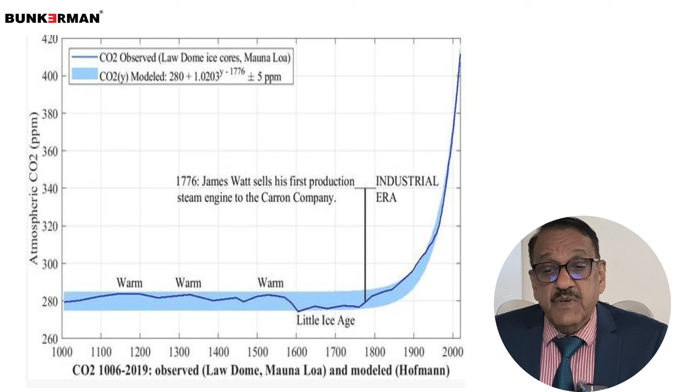Today, the world average of CO2 in atmospheric air has already risen from earlier 280 parts per million to about 425 parts per million. But in places like Delhi, it is now crossing even 600 to 900 parts per million at several places. This is now becoming a cause of great concern for us.

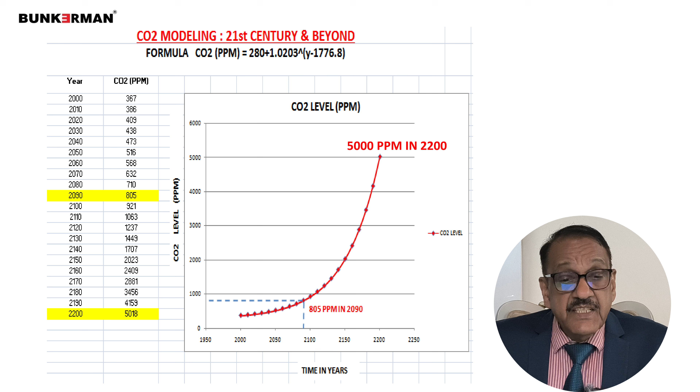If we do not arrest this rising trend of CO2 in atmosphere now, then very soon it is going to cross a very dangerous level of 5000 parts per million in the near future, as shown in this graph. As you can see, the acceptable level of CO2 in indoor breathing air is about 500 to 700 parts per million.

People start having complaints of stuffiness and odors beyond this level. Even ASHRAE recommends a maximum level of 1000 parts per million for CO2 in indoor air. Any further increase of CO2 beyond 1000 parts per million results in general drowsiness and adverse health effects. A level of 5000 parts per million may lead to serious oxygen deprivation, leading to permanent brain damage, coma or even death.

Therefore, at this level, there is a danger even to the basic survival of human beings and other life on earth. And that is the reason why the whole world is now worried about the devastating nature of rising pollution, global warming and climate change. Fortunately, the Bunkerman technology addresses this problem and provides a sustainable solution, as shown in these pictures.

But subsequently, due to increase in industries, vehicles, traffic, increase in air conditioning, deforestation, etc., the increased carbon emission in the environment has gone beyond the absorption capacity of the natural system on earth, thus resulting in disruption of this earlier existing sustainable system.

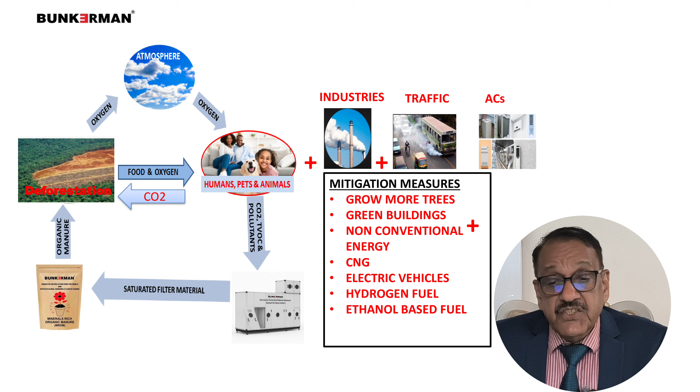Over the past few decades, our government is trying to overcome this problem by adopting several techniques such as growing more trees, green buildings, non-conventional energy, CNG, electric vehicles, hydrogen fuel, ethanol-based fuels, etc.

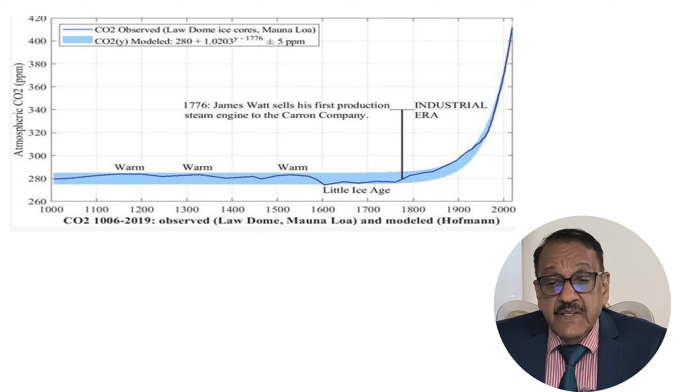But this rising graph of global warming and CO2 content in atmospheric air is not going to stop, and it is continuously rising further at a steeper rate than earlier. The reason for this is that whatever little reduction we achieve in carbon emission by the above measures is getting nullified and overtaken by further increase in carbon emission due to increase in population, industrialization, vehicular traffic, air conditioning and other development activities.

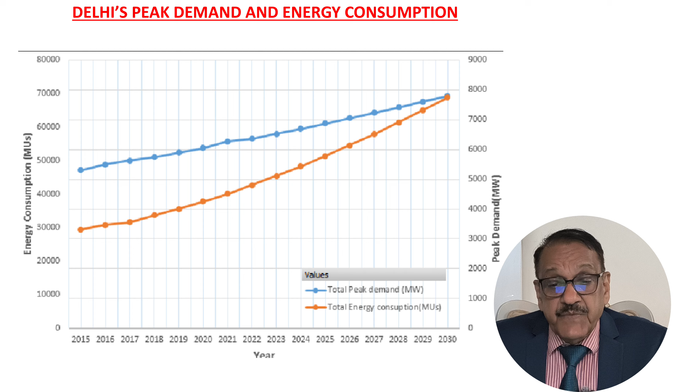Therefore, the model adopted to solve this problem should be such that it is able to reduce atmospheric pollution despite all the above increasing factors in future. The model presented by Bunkerman technology fortunately offers such a befitting model to suit the above requirement.

In Bunkerman systems, we absorb CO2, VOCs and all 8 air pollutants of AQI, that is PM2.5, PM10, carbon monoxide, sulfur dioxide, nitrogen dioxide, ammonia, ozone and lead, and also other toxic gases present in the air into our Bunkerman filters, and we do not release these pollutants back to the atmospheric air.

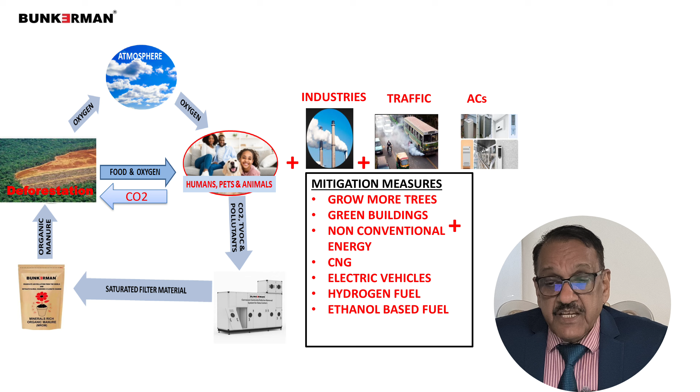The filter material is so designed that it gets enriched by the air pollutants in such a way that the resulting material becomes a combination of stable compounds which can be utilized to manufacture mineral-rich organic manure. This manure provides nutrients to farmers, crops, trees and plants. Thus, the complete cycle of movement of air pollution forms a sustainable eco-friendly system as shown in this picture.

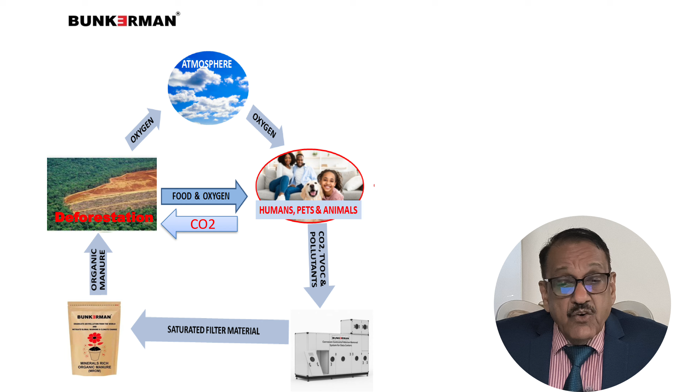This way, Bunkerman systems work as a supplement to natural trees and plants. They absorb the excessive CO2 and other pollutants from the air, both indoor as well as outdoor, which have now become beyond the capacity of the natural trees, plants and other systems on the earth. And these are converted into mineral-rich organic manure, which ultimately results in more production of food and oxygen by crops, trees and plants on the earth.

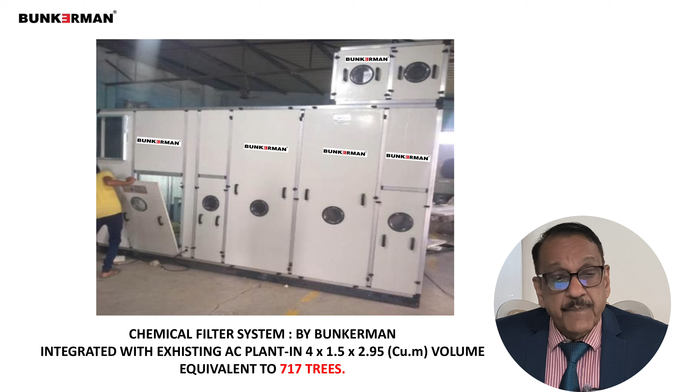Thus, an existing sustainable system which got disrupted by global warming may be fully restored on earth now by using this Bunkerman technology. Another advantage of using Bunkerman systems is that when these systems get integrated with the central air conditioning systems of buildings, they result in a power saving of 40 to 60% in AC plants. This saving is achieved by eliminating a large number of air changes per hour to control CO2 concentration within specified limits in such buildings. This will be explained shortly while covering the successful case studies by use of this technology.

Another reason why the present measures adopted by government are proving insufficient for climate action is that so far people are considering only fossil fuel industries and vehicles as sources of pollution. A very important and significant part of CO2 emission in air due to respiration by human beings and livestock has so far been neglected by researchers and planners, for reasons known to them.

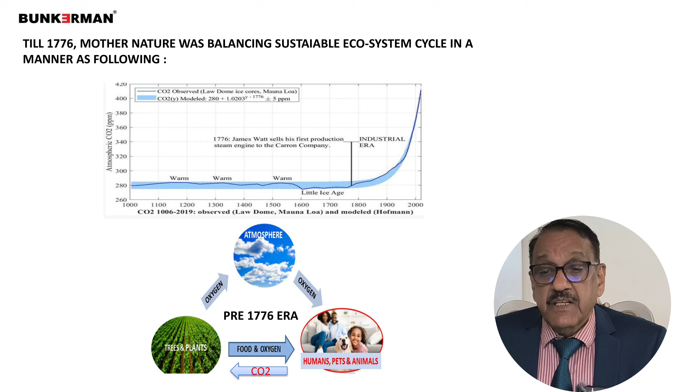Some justify it by calling it a natural phenomenon which should be taken care of by the natural systems of the earth. This justification could be accepted before the onset of the industrial era, when the CO2 level in air was in the range of 280 to 300 parts per million and the population on earth was limited. But now, since the natural system of trees and plants existing on earth has already failed due to overloading, this significant factor cannot be neglected anymore.

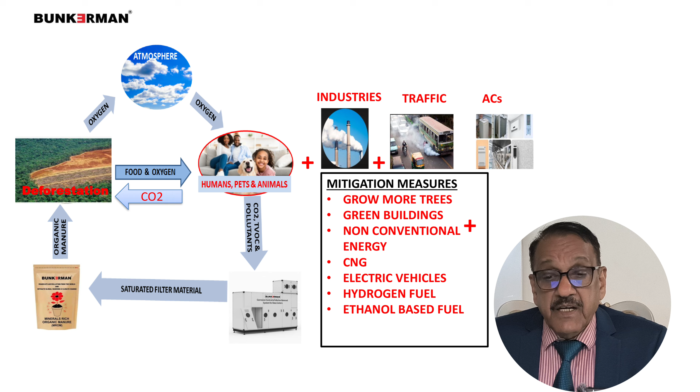Bunkerman has found in their study that in India, about 13% of CO2 emission is just by human respiration, and about 15% is due to respiration by livestock. Fossil fuel and industries are responsible for only 72%, the rest of the pollution in India, as shown in this figure. Now this 28% of CO2 emission by respiration comes to approximately 40% of the total pollution often talked about in India, that is by fossil fuel and industries.

Therefore, the CO2 emission by respiration by human beings and livestock, which is 28%, becomes a significant figure to be tackled if we want to arrest our environmental system at its present level, or want to restore it back to the pre-industrial era level.

This is what has been attempted by Bunkerman technology.

It is also to be understood that a human being multiplies the CO2 content in atmospheric air by a factor of about 146 with every inhale and exhale during respiration, as shown in this figure. This is the main reason that in closed spaces and AC buildings, the CO2 content is often found exceeding the permissible limit of 1000 ppm.

The same thing happens to VOCs, which keep accumulating in the closed indoor space. And since this adversely affects human health and cognitive function, it becomes essential to tackle this problem on priority.

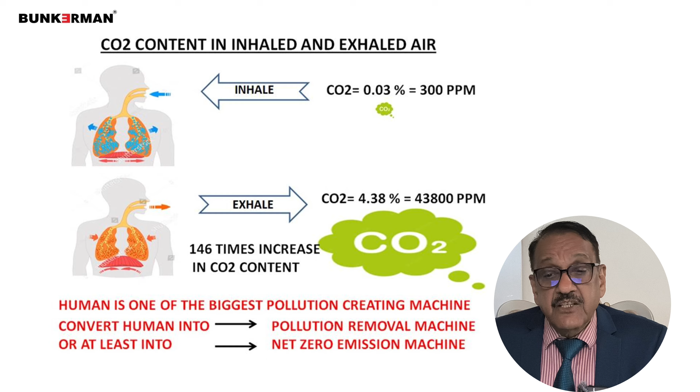While a fully grown tree of 10 to 15 years of age is capable of absorbing only 20 to 25 kg of CO2 in a year.

Thus, in case we want to control the CO2 level in the atmosphere merely by planting more trees, then we need about 17 trees per person to absorb CO2 emitted by us through respiration, about 20 trees per person for our livestock, and about 94 trees per person for the CO2 emission from our industrial products.

So this way we need about 131 trees per person in India, whereas we have got only 28 trees per person in our country as on date.

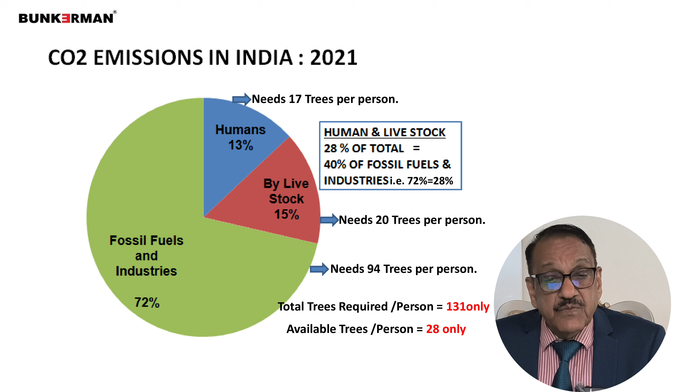In fact, we should be thankful to countries like South America, Canada, Bolivia, Russia, etc., which have thousands of trees per person. The world climate is safe today because of their trees in thousands and hundreds per person, and not just because of our 28 trees per person.

And look at our neighbors: Pakistan has got only 5 trees, Israel 2 trees per person, Egypt 1 tree per person, Singapore almost 0, less than 1 tree, Saudi Arabia less than 1, Qatar less than 1, UAE less than 1, Bangladesh is having about 6 trees per person.

And these are the countries which are directly affecting our environment in India. Therefore, while planting of more trees must be encouraged, depending merely on plantation of trees may not be sufficient to solve the problem in the current scenario.

Hence there is a need for technology like Bunkerman, which provides a system working as thousands and millions of artificial trees to absorb air pollution and convert it into mineral-rich organic manure.

It has been proved that with Bunkerman technology, buildings in metro cities, which are often called concrete jungles, can clean the environment 1,000 times better than the green forest on that area.

Now I will tell you some successful case studies which have actually been implemented on ground in India. The first case study is the DDCS control center at Guwahati.

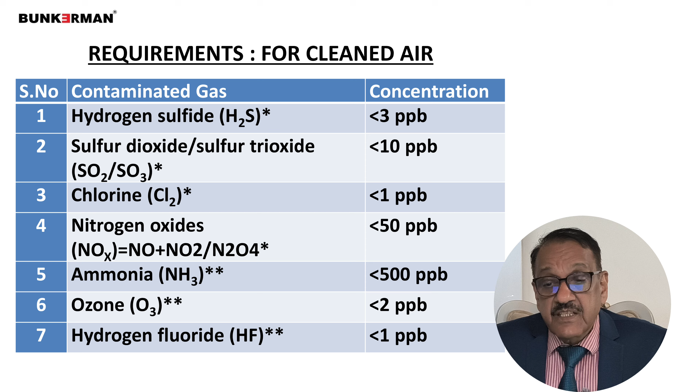The Bunkerman systems have been successfully used in India over the past about 2 years. The first major system was installed at the DDCS control center, Guwahati refinery, for corrosion control and CO2 and VOC removal in a large space of about 9,000 cubic meters.

The system has been working perfectly for the past about 18 months, maintaining the G1 conditions for corrosion control and keeping CO2 and VOC levels within permissible limits as designed.

The system has resulted in a power saving of about 40% by eliminating 95 air changes per day in the building. Earlier, the building required 4 air changes per hour, but now it runs satisfactorily with just 1 air change in 24 hours.

Thus, a power saving of about 2 lakh rupees per month is being achieved by this system. The ROI has been fully achieved in just 15 months' time, and now the system is earning Guwahati refinery a power saving worth 2 lakh rupees per month.

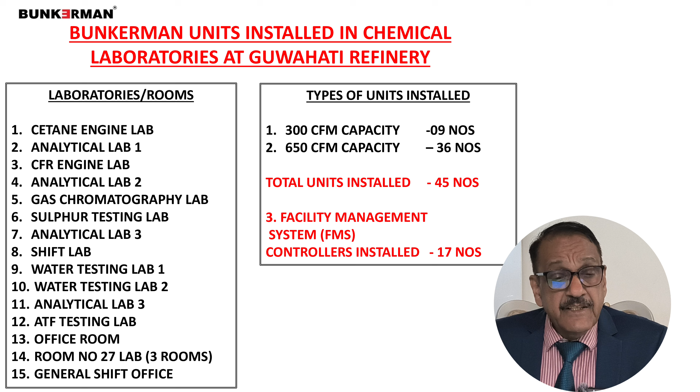Also, about 45 ductable Bunkerman units have been installed in 15 chemical laboratories of Guwahati refinery, with 17 facility management systems. These are working satisfactorily and ensuring the desired indoor air quality as per specifications in these laboratories over the past about 8 months.

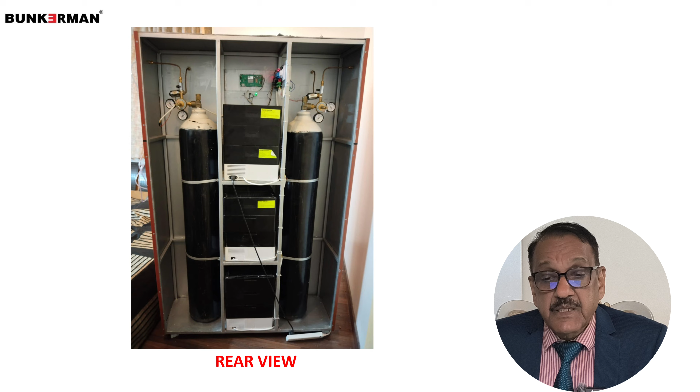Bunkerman standalone models of different kinds have also been installed in a number of houses, offices, shops, factories, hospitals, hotels, data centers, etc. in India. These have also been working perfectly and providing good indoor air quality as per specifications over the past about 2 years.

Also, Bunkerman provides outdoor units working as artificial trees to absorb pollution from the ambient air and convert it to mineral-rich organic manure. These units have been installed in open spaces like verandas, rooftops, gardens, etc. They are also functioning properly and cleaning the environment over the past about 2 years in different locations in India.

Some projects are under planning. This is the case study of a pilot project for an office building in Gurgaon, housing about 334 persons. Since the CO2 level in the building was rising...

...to 2000 parts per million, the users were going to increase the installed capacity of the AC plant from 185 ton to 255 ton. But with the integration of Bunkerman technology, we reduced the AC load from 255 ton to 165 ton. Thus, a power saving of 40% is achieved in this building by Bunkerman systems.

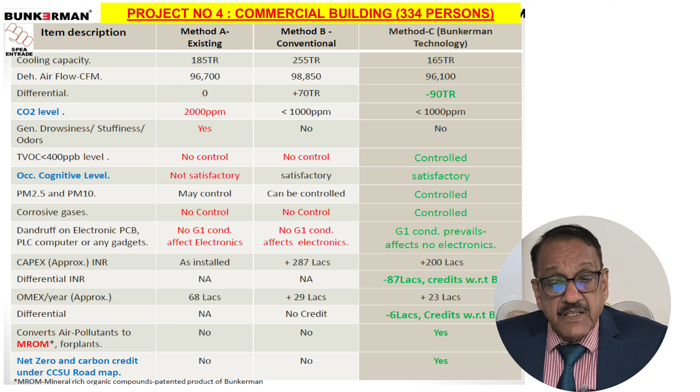In addition, this building will have advantages like ensuring the desired indoor air quality, controlling VOC, corrosion control for electronic equipment, and they will also claim carbon credits and become net zero before the scheduled time.

A long-term proposal for solving the problem of rising pollution in Delhi by use of Bunkerman technology is also under examination by the Delhi government. They have proved to the Delhi government that if they deploy Bunkerman technology of direct carbon capture at negative cost in Delhi, they can reduce power consumption in Delhi to the tune of rupees 568 crore per month. In addition, the Delhi government can earn carbon credits worth 83 crore per month.

To summarize, Bunkerman technology ensures direct carbon capture at negative cost. It removes all 8 pollutants of AQI, CO2, TVOC and other air pollutants. It also converts air pollution into mineral-rich organic manure, thus moving pollution from air to soil. It results in 40 to 60% energy saving in HVAC systems. It removes indoor and outdoor air pollution simultaneously. It is a fully circular, sustainable and eco-friendly system.

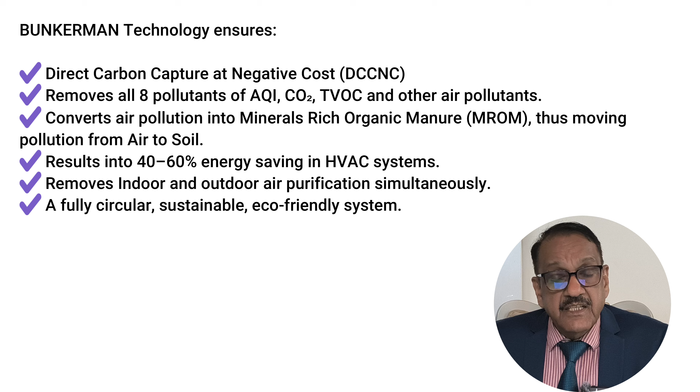At the end, I would like to say that with the Bunkerman system, while we directly meet United Nations SDG 13, that is climate action, these systems also meet other SDGs as enumerated in this slide. Bunkerman technology starts with meeting SDG 13, climate action, by direct carbon capture at negative cost, reduction of greenhouse gases, power saving and earning carbon credits.

But it also fulfills the following SDGs: good health and well-being. It provides clean indoor air which reduces fatigue, headache, respiratory diseases, and improves cognitive performance. SDG 7, affordable and clean energy: about 40 to 60% energy saving is done in HVAC systems by Bunkerman technology.

SDG 9, industry, innovation and infrastructure: indigenous scalable technology integrated in buildings, industries, hospitals, data centers, shopping malls, hotels, etc. fulfills the aim of this SDG 9.

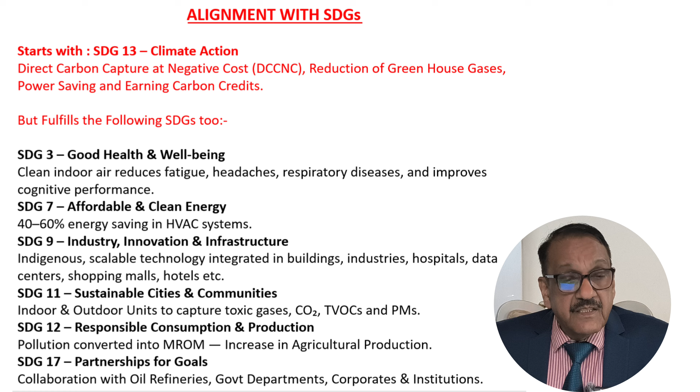Also, sustainable cities and communities: the indoor and outdoor units are installed to capture toxic gases, CO2, TVOC and particulate matters, which will ensure sustainable cities and communities. SDG 12, responsible consumption and production.

Pollution is converted into MROM, which increases agricultural production, so it meets SDG 12. SDG 17, partnership for goals, is also met by collaboration with oil refineries, government departments, corporates and institutions.

This way, this is the right approach to achieve the aims of United Nations Sustainable Development Goals.